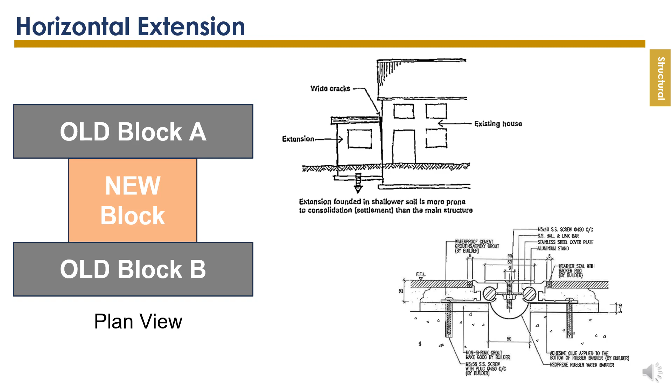Other considerations include whether the density has exceeded any government requirements. Also, we shall consider whether there is enough capacity for the existing building services installation to support the new extension building. Last but not least, we shall consider the circulation connecting the original building block and the new extension building, such as adding new bridges or allowing some openings at the external wall to connect two buildings together.

For the vertical extension, the considerations are similar to the horizontal extension. We have to consider whether the existing structure is able to accommodate the loading of the new structure on top of the original structure. For example, we have to consider the bearing capacity of the existing column and foundation, and whether there is need for structural strengthening works.

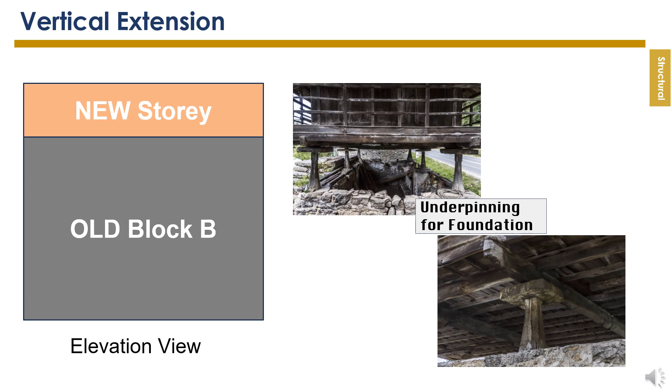And also we shall consider the connection details between the original structure, such as the column head, and the new structure, especially if the materials of the new structure are different. For example, the original building uses concrete, while the new one uses steel. Then we have to consider detailing about the connection, how it works.

Concerns of additional storey. Firstly, we have to consider the planning aspects. It refers to the height restrictions, also the gross floor area restrictions, etc. Secondly, we should also consider the lease control, that means whether it is contractually viable to increase those floor areas. Thirdly, it affects the fundamental issues of building control as well, because it affects the density and it might affect the means of escape, lighting and ventilation, or barrier-free access controls, etc.

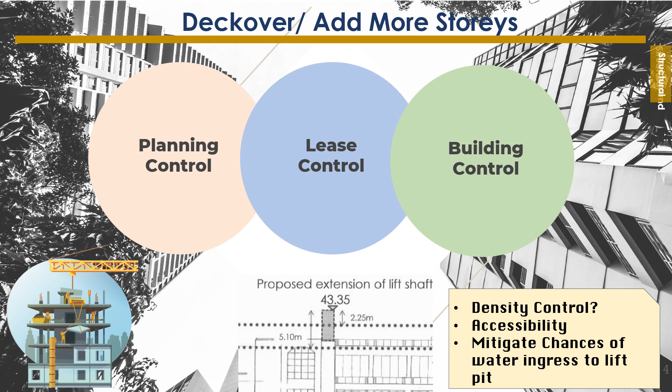One of the structural concerns is whether the existing load bearing capacity is enough. Even though there are some safety factors, we have to consider the existing design. For example, if the existing building has only 2 storeys and you add 1 more storey, then the loading increases by 50% of the original design. If the existing building has 10 storeys and you add 1 more storey, then only 10% extra on the loading, which might be allowable in the safety factor without additional structural strengthening works.

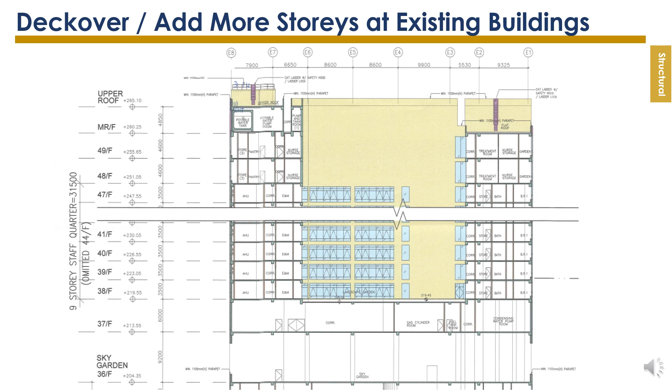Apart from structural strengthening works, we can also reduce the loading applied on the floor. For example, using lightweight material such as lightweight concrete block walls or some metal structures to reduce the dead load of the construction itself.

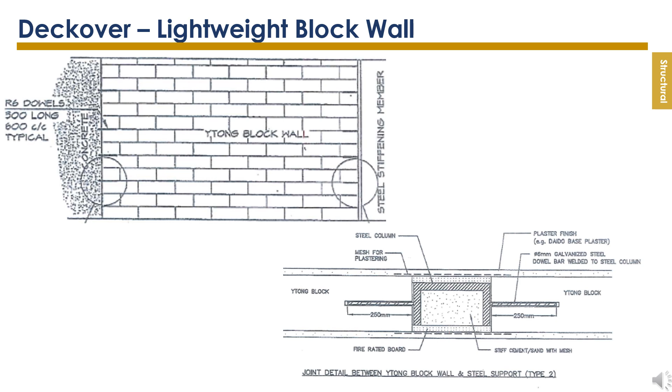Composite flooring system means lightweight reinforced concrete cast on profiled steel decking. There are a lot of advantages of using this system. For example, the installation is fast. It reduces the use of formwork, and due to its fast installation, it can provide a working area earlier during construction, so it can increase the efficiency of the construction. Apart from that, it also allows long spans. Only a 200 mm deep profile allows 6 meters of span. Also, for FRR protection, it allows adequate rating.

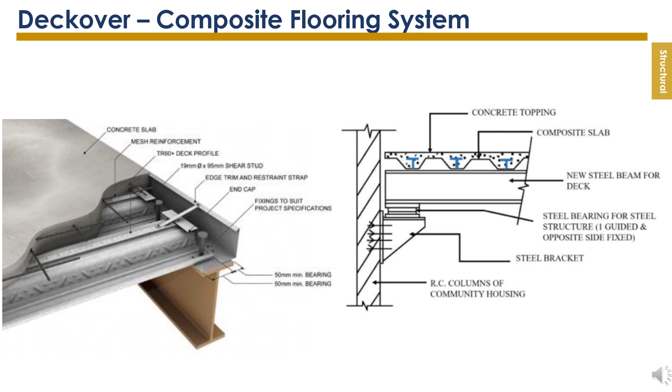And how to actually install this composite flooring system? Firstly, we have to fix the metal decking on structural steel beams at predetermined points by welding or fasteners. Then we can install the shear connectors by welding and concrete with lightweight concrete on the decking. Additional rebar might be added if required.

Strengthening works might include adding secondary beams or enlarging beams. Adding steel beams is more convenient and feasible than concrete ones. Also, an external bonded system might be considered, such as steel plate bonding on the column and also spraying some fiber reinforced polymer onto the column.

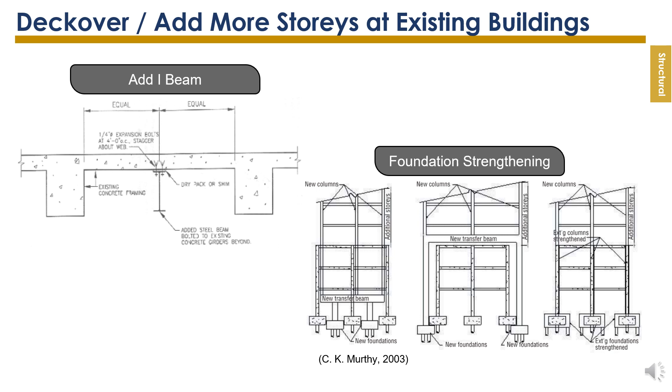One of the options for structural strengthening is carrying out sectional enlargement by RC jacketing. We shall ensure good bonding between the newly added layers and the existing concrete surfaces. Even though it saves more space than adding columns, it also has a lot of disadvantages. Due to its extensive level of surface preparation, it is more expensive and time-consuming.

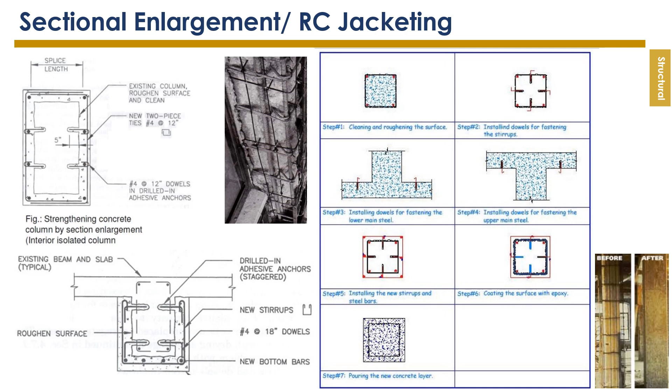Another method of structural strengthening is carrying out an external bonded system by adding steel plates onto beams or columns, these kinds of structural elements. We should be aware of what kind of fixing method we'll be using. If it is under UV exposure, the epoxy may degrade over time, so mechanical fixing by anchor bolts might be more preferable.

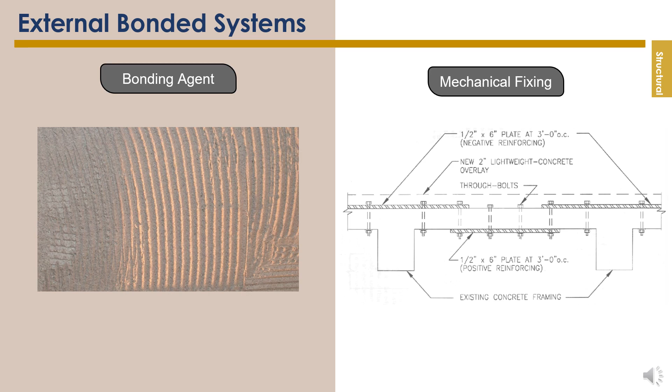Another structural strengthening method is the use of steel plate bonding. Firstly, we shall drill holes and cut the steel plates to the desired dimension. Secondly, we shall properly prepare the surface by removing all the plasters, finishes, or other contaminants on it, and then grind the bare concrete surface by mechanical grinders. Then clean the surface of any loose materials by compressed air.

Thirdly, the anchors shall be installed, using anchors of not less than 20 mm in diameter, and the depth shall not be less than 200 mm. Fourthly, a bearing plate with stiffeners might be needed for the columns so as to transfer the loading from the above floor to the below floor. Then we have to inject some epoxy resin through the injection hole so as to have a better bonding. Last but not least, proper curing is needed as well.